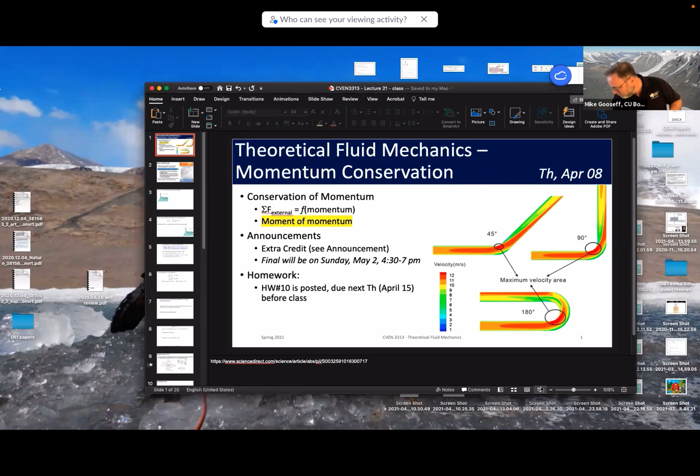This is the same cover slide we had last Thursday before the exam, but we're now working through this moment of momentum concept that we'll be talking about today. For announcements, I'll run over the extra credit real quick again.

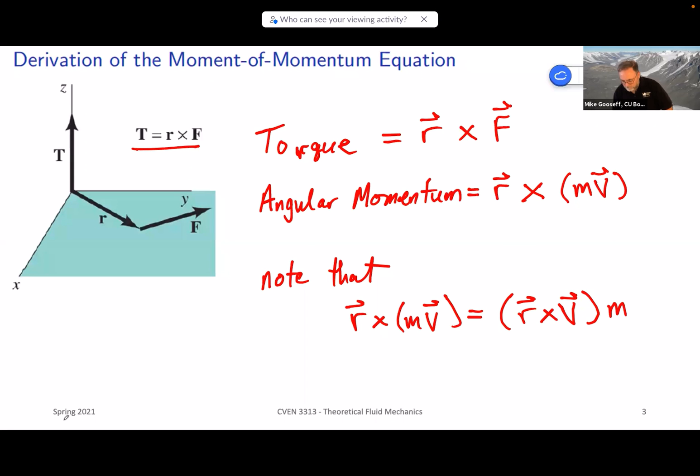We had this equation when we were deriving the momentum conservation equation from Newton's second law, which said that the sum of the forces acting on the system are equal to this derivative of the integral of momentum of our system, which equals the momentum stored within a control volume plus any exchanges across the control surface of momentum.

If we extend this equation to the moment of momentum, we would basically have something that looked like this: the sum of these torques, R cross F for the system, is equal to d dt, this big derivative with respect to the integral over the system of R cross V, and then outside we're going to keep rho and dV, where this V with a cross through it is the volume.

So this is essentially looking at the moment of momentum as it's summed outside of this system or acting on the system, which is equal to this derivative of the integral of the moment of momentum for the system itself.

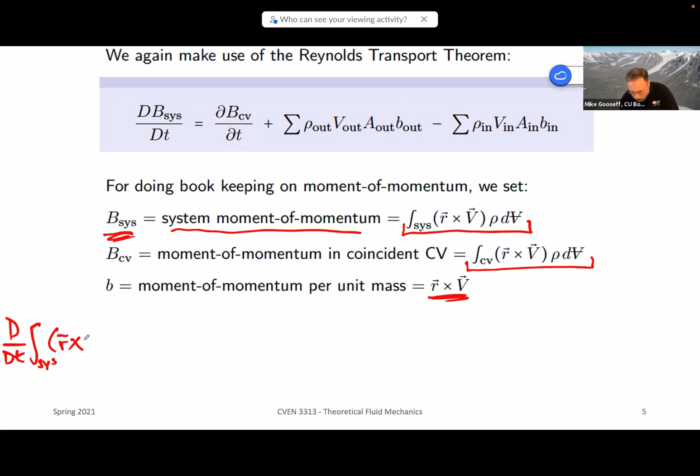So d/dt, the integral over the system of the radius vector multiplied by some velocity vector times rho dv. This is the system component, so this is the left-hand side here, okay?

Let me try to get clever and do some color coordination. So this component here we'll write in blue. So we say this equals del t of the integral over the control volume of the stored moment of momentum, so R cross V.

rho dv, and again, the v with a cross through it is not velocity, this is now volume. And then let's look at the exchanges. Now let's go with green, and let's do the outflows first since that's the sequence we're going in. So we're going to add the sum of rho out times v out

times a out. You're probably wondering, well, that seems kind of lame, we've done that already - that is essentially these three pieces. Now we have to add the little r component, so now we multiply this by r cross v, and then I'm just going to put an out here. Okay, and then finally, pen color, do something that shows up a little better.

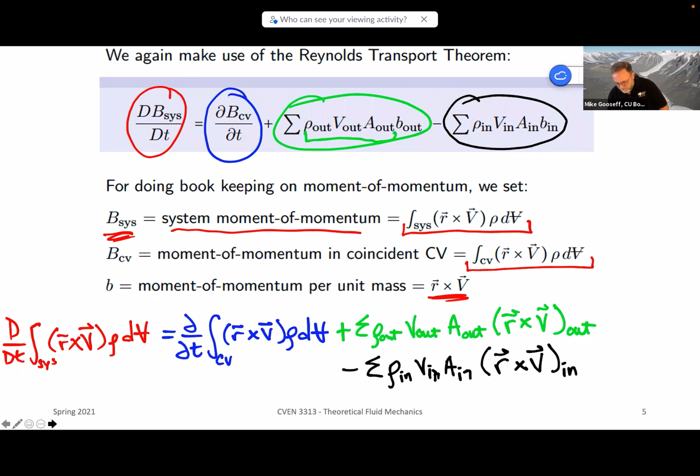So the interpretation of this expression - these are the four pieces we just wrote on the previous slide. The left-hand side was the top term, this was the first one on the right-hand side, and then these are the second and third on the right-hand side, right? So essentially, this term is the rate of change of system moment of momentum.

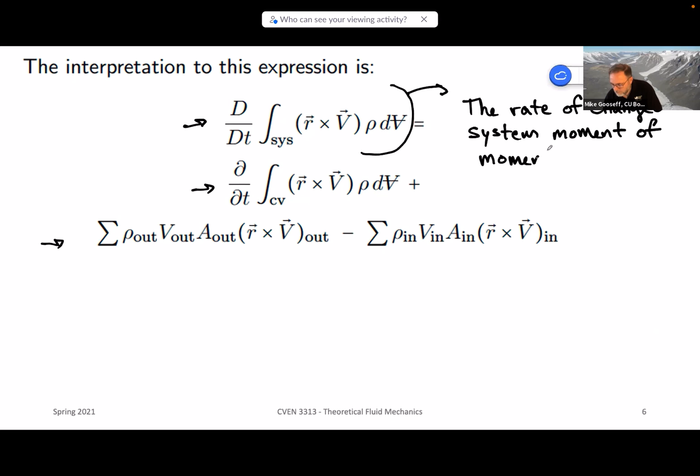Okay, I guess I should have probably kept my colors the same way I did on the previous slide, sorry about that, but I'm going to change color for this one. What was our second one? I think it was red. What did I do here? No, we were red then blue. Okay, so the second one here that's blue is this first term on the right-hand side now. Its interpretation is the rate of change of the moment of momentum in the control volume.

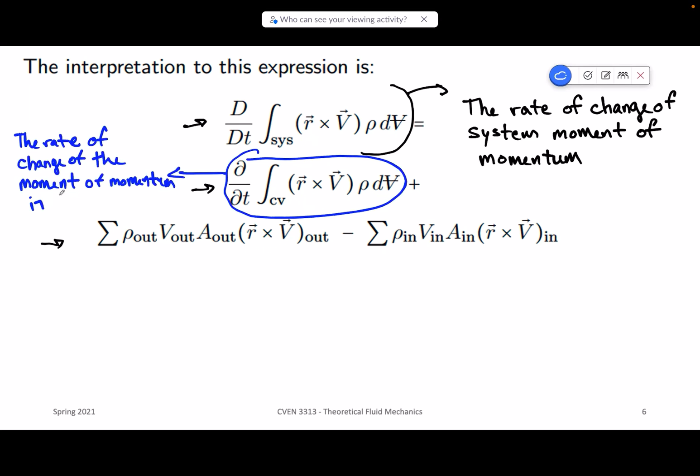So we know that in part because the integral is only done or evaluated over the control volume. That little c-sub-v tells us that this is about storage within the control volume as opposed to the entire system in the top, what's indicated in the top term in this case.

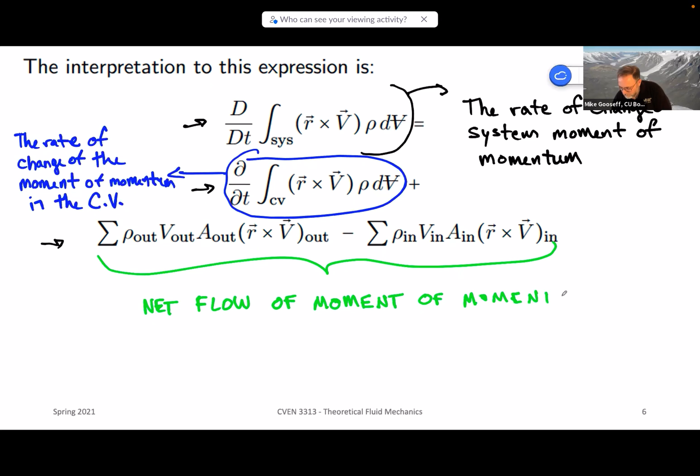And then finally, let's see, I used black on that one. I guess we'll go with green to just indicate that these two are about overall - these last two terms are about the net flow of the moment of momentum across the control surface.

Right, and we know that in part, I guess we know that mainly because we have ins and outs noted, but if we had left it in integral form, the integral would have been taken over C-sub-S for evaluation rather than these ins and outs, right? Or rather than CV, rather than CS. So that's one clue to think about what each of these terms mean, looking at where or what that integral is being taken or evaluated. And then in the case of the ins and outs, clearly we're looking at the fluxes across the control surface.

Well, I'm not real fond of how light that green is, I'll try to stay away from that. That's not a lot of contrast there with the background being white. So, all right, let me change my color.

Was there a question? Yeah, we just have a question in the chat. Just kind of what are the units for R cross V?

Let's see, so it's just going to be like a moment. R cross V is going to be meters, or length squared per time. I was thinking back to torque. Torque is going to be like a force times the length, which we had written on the first slide today.

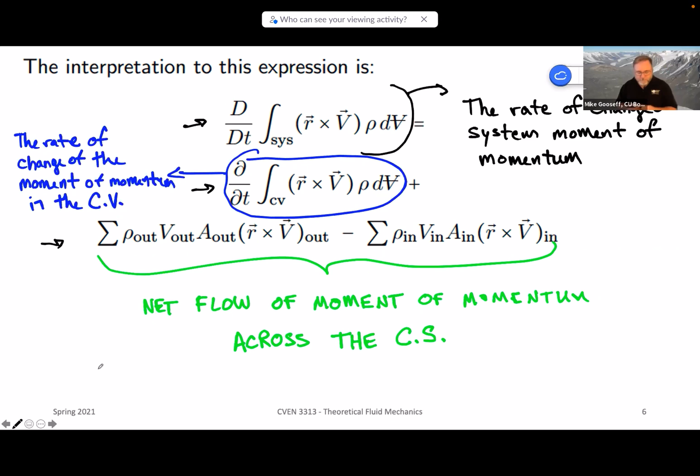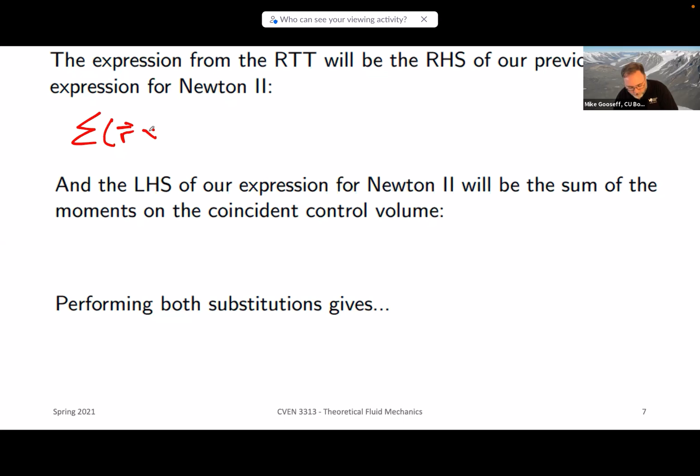Great, okay. So the expression from the Reynolds transport theorem will be the right-hand side of the previous expression for Newton's second law. In other words, we can write this sum of R cross F, so this is the torque or moment part. The system is equal to d/dt of the integral over the entire system of the contained moment of momentum.

So then the left-hand side of the expression for Newton's second law will be the sum of the moments in the coincident control volume. So what do we mean by that? Essentially that the sum of R cross F of the system is equal to the sum of R cross F for the control volume as well, when we're coincident in that control volume.

So if we substitute both of these things into the long equation from the previous two slides, it looks like this. We're going to have the sum of R cross F over the control volume equal to the time derivative of the integral over the control volume of R cross V times rho dV. This is the control volume term, plus the sum of rho out, V out, A out, times our R cross V also going out.

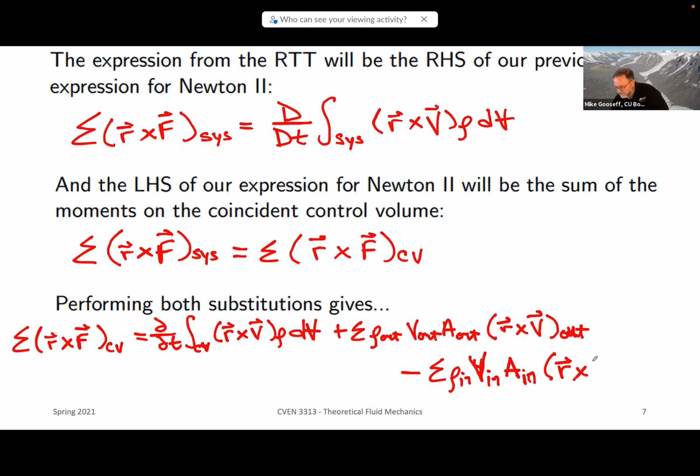My V's are not coming through, sorry about that. And then we subtract the sum of the inflows: rho in, V in—this is supposed to be velocity, not volume—A in, multiplied by R cross V on the inflow.

So we've evolved this a little bit, we still have forces on this left-hand side, but now we're looking at the forces acting on the control volume rather than just the system overall. We've substituted those, but this is in the case of the system being coincident with the control volume.

So on the next slide, we're going to look at what happens when we have steady flow, how we simplify, and what happens when we account for being incompressible. In that case, rho out equals rho in, so we can simplify again. All right, let's do that on the next slide.

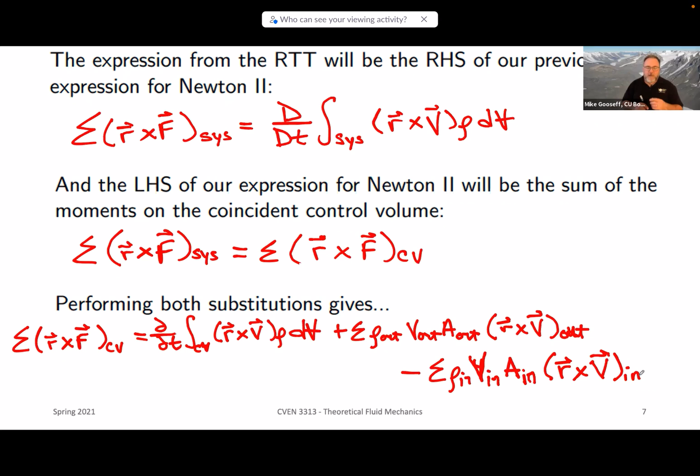This is something we did with momentum as well, but now we'll do it with moment of momentum. When we have steady flow, there's no change in time, so that term is essentially going to go away. What we end up with then is the sum of R cross V acting on the control volume being equal to just the exchanges across the control surface.

So the sum of rho out, V out, A out, multiplied by R cross V out, and then subtract the inflows. I think I have one little error in my notes, but I just identified it, so let me try to avoid it here: rho in, V in, A in, times R cross V in.

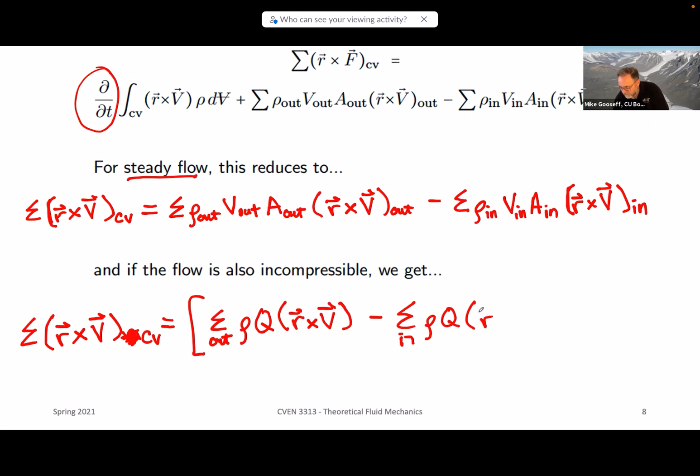Acting on the control volume is equal to, now we can write this in a more summary way: the sum of the outputs of rho times Q times R cross V, and then we subtract the sum of the inflows of rho times Q times R cross V as well.

So all we did was simplify that because the rho is the same for whatever fluid we have coming in and going out, and we got rid of that temporal term as well, since we had steady flow condition and incompressible flow.

I think this will make a little more sense when we start to look at some diagrams and so forth when we put this into motion to put to use.

First, I want to talk a little bit about angular momentum because we have to deal with some velocity nomenclature, which is to say that sometimes things are spinning in one direction, but they have outputs of velocity going sort of in the opposite direction. We need to think about which of those impact the velocities we have here, and which velocities we're going to use for the V and vector V components in this equation.

So angular momentum here, we are interested in relating the torques or force moments to angular momentum. For example, what torque flows from a rotating sprinkler, does the flow from a rotating sprinkler cause, is a reasonable question.

So let's take a real simple sprinkler. We have flow coming in down at the bottom, obviously it goes up the shaft here, sort of the center axis, and then it gets distributed out each of the two arms. And what you can see is that omega is telling us we are spinning, if we do the right-hand rule, we're spinning sort of in the upward direction. But the flow is coming out in the opposite direction.

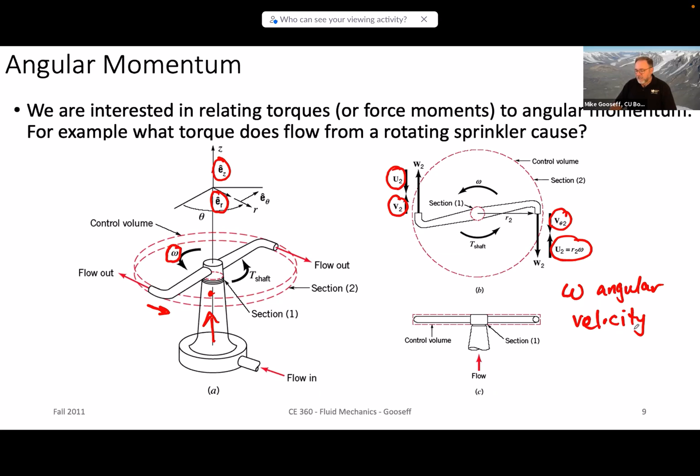You can see that the torque about the shaft is going in the same direction as omega, as this angular velocity. But the angular momentum is dealt with by looking at W, V, and U out at the edges. So let's relate all of these things on this next slide.

Okay, here we go. So the simplified form of this is that the shaft torque, or the torque about the shaft, is equal to minus m dot in, so that's just rho times Q, times plus or minus r in v theta in, and I'll define each of these below, plus m dot out plus or minus r out v theta out. So T shaft is obviously the torque on the shaft.

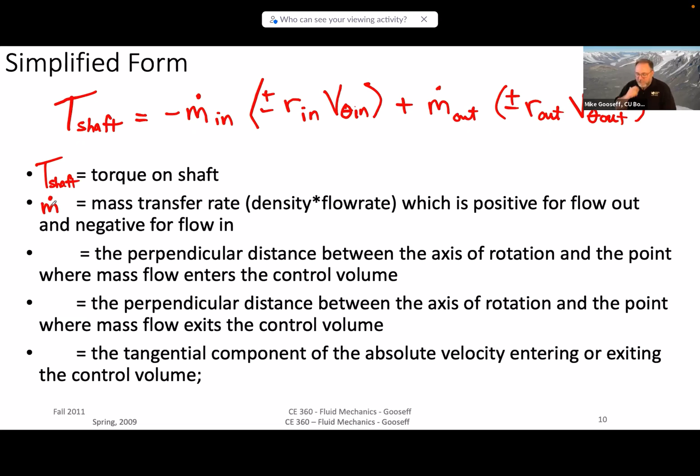This m dot is our mass transfer rate, so it's density times flow rate, rho times Q, which is positive for flow out and negative for flow in. Those rules are defined by the original Reynolds transport theorem, whether that sign is negative or positive.

R in is the perpendicular distance between the axis of rotation and the point where the mass flow enters the control volume. For a sprinkler, R in tends to be small or zero because you're putting water directly up that shaft. It comes up in the axis itself vertically.

And then R out... is the perpendicular distance between the axis of rotation and the point where the mass flow exits the control volume. So now we're looking at essentially the length to get out to where the sprinkler head is spraying the water out.

Finally, V theta, we could have it in and out, but V theta is the tangential component of the absolute velocity entering or exiting the control volume. This is critical because the direction of this, if it's tangent to the circular path of the sprinkler head, we need to account for a component acting perhaps only tangent to that circle, in the theta direction. So we're working now in this framework of radial coordinates.

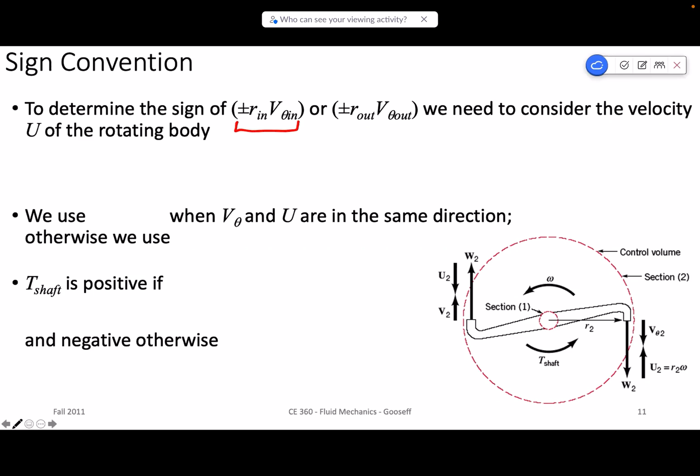So to determine the sign, we just got a few questions from a couple slides back. Someone asks, isn't the sum of R cross F for the CV part? I'm not quite sure what they're asking there.

Oh, on the left-hand side, did I goof that up? Let me see. Yeah, I was just saying it was R cross F, not R cross V, for the CV. Yep, you're right, I did. I made that mistake twice. It's funny because in my notes I had this one wrong as an F, and I knew that was incorrect, but I did not catch that I could completely goof this one up.

This should be, my apologies, R cross F. Yeah, so this is the torque, and this should also be R cross F. Sorry about that.

People are also asking to clarify the differences between momentum, moment of momentum, and angular momentum. The angular part of this is simply that we have something that is spinning. The classic example to get this idea across is using sprinklers, but ultimately we could be looking at forces acting in any direction that gives us a torque, right away from...

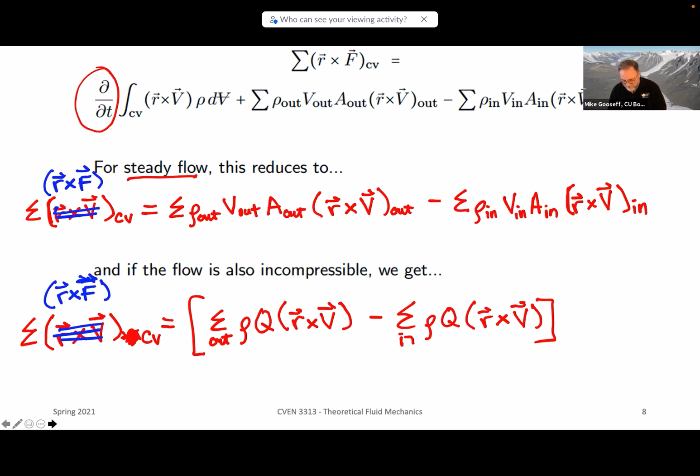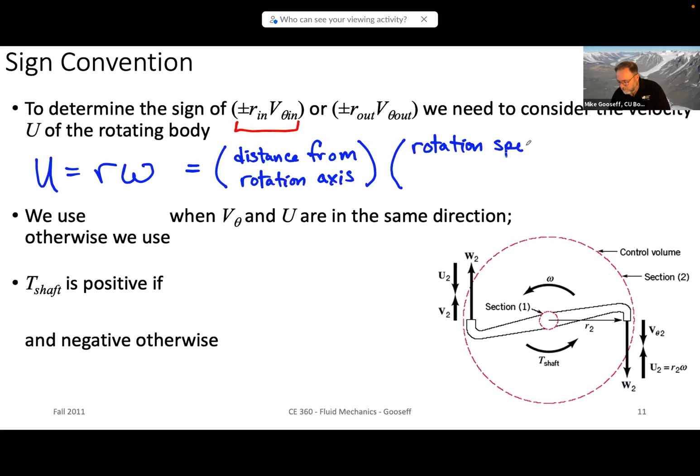Okay, so we need to consider the velocity of the rotating body U, and U here is going to be equal to R times omega. R is clearly the distance from the rotation axis, and then omega is the rotation speed of the shaft. That's those two values coming together to give us the velocity of the rotating body.

The speed at which a sprinkler head is moving in the plane that it's moving. Now we're going to use plus R times V theta when V theta, this tangential velocity, and U are in the same direction. Otherwise, we're going to use the negative version of this, negative R times V theta. So it all just matters whether V theta and U are working in the same direction or not.

And then this shaft torque is positive if it's in the same direction as W, capital W now, not omega, capital W, and negative otherwise. So in this case, this capital W here is essentially indicating our momentum that's coming out the end.

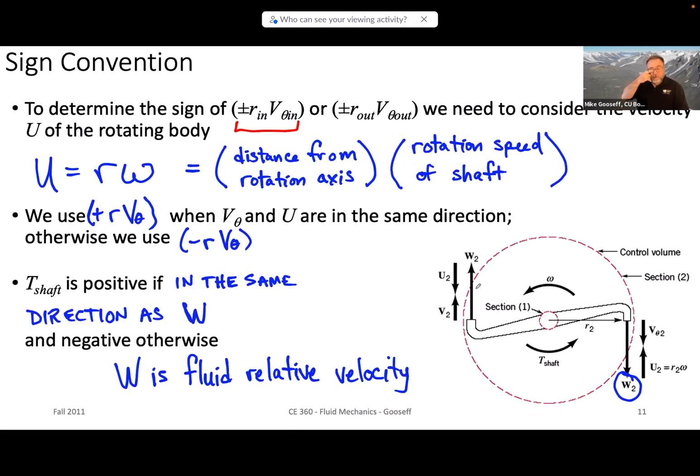Now what do we mean by that? Well, it's about this difference in a way between U and V, essentially acting in opposite directions, so W is sort of the resultant in some way. Let me define that on the next slide.

After the sign convention, we'll talk about, let me make sure I've got this right. We'll have the tangential velocity that we'll define here, this V sub theta.

All right, so V theta, this tangential velocity, is equal to W plus U, and capital W, as we said, was the fluid relative velocity. And U, capital U, is the rotating body's velocity.

So that's why on the previous slide, when I wrote capital W, it's the difference between, if we algebraically moved U to the left-hand side, it would be V theta minus U, this difference, the balance then for this velocity.

So for all of the angular momentum problems that we're going to solve in this class, we'll use this fairly simplified momentum equation, which I wrote out on the previous slide. The torque for the shaft, T shaft, is equal to minus m dot in times plus or minus r in v theta in, plus m dot out times plus or minus r out v theta out.

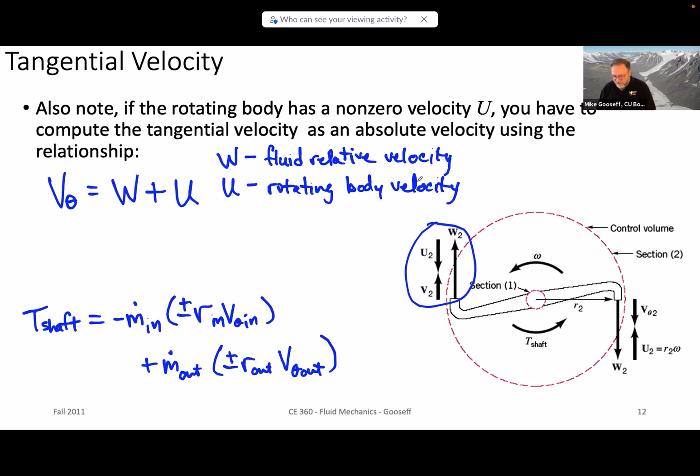I'm not quite sure why that went away, but let me just note again this relationship for these guys at the top, this definition of v theta, the theta is actually used over here. In any event, capital W is the product or dependent on v theta and U, and then we're going to use that v theta when we get down to calculating the shaft torque.

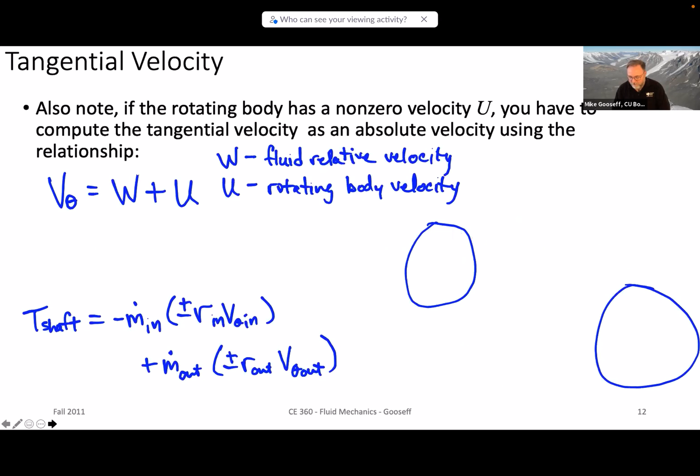Okay, so the next thing I have queued up is to go through an example where we put all these things together using this torque equation, and then go through how we calculate v theta and so forth. Hopefully this will all culminate a little better, because I realize it feels very nebulous without a more concrete demonstration of where these velocities lie, how they relate to each other, and how they help us figure out something like this torque on the shaft.

Okay, so here's our example. We have 5 liters per second of water entering the rotor shown along its axis of rotation. So this is that, 5 liters comes in, it goes straight up the shaft, and then there's a cross-sectional area of each of 3 nozzle outlets of 18 square millimeters.

So how large is the resisting torque required to hold the rotor stationary if theta equals 0 degrees? In other words, we're going to look down on this. Let's see, do I have a better picture? I don't. Okay, so right there, that's where theta is defined. Theta is essentially an angle that says whether you're tangent to the line of this radius or whether you are not tangent to that. So it's sort of the degree of tangentiality, let's say.

And so if theta is equal to 0, then these are probably scooped back a little bit, and they are simply set up in a more streamlined way to go with this rotation.

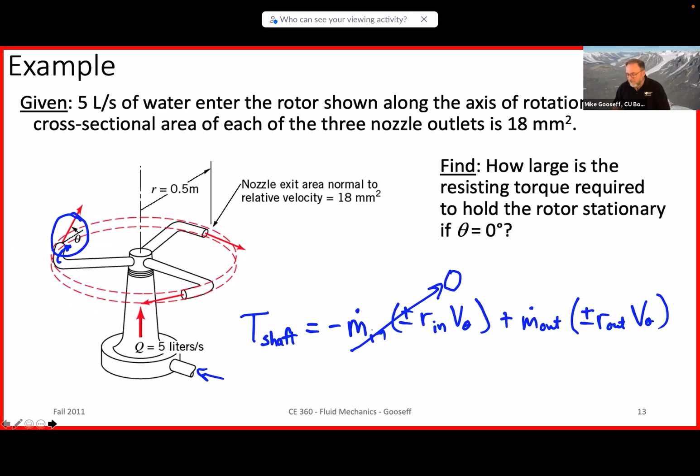Okay, so that's where we're going to go next as we work this out. I'm going to move to the next slide. Oh, I did not copy over the image on the next slide, but I think it will be fairly straightforward. The other thing we need to do here is note that on the previous slide, let me get my image back.

This theta that we identified has something to do with this direction of flow, and with the way we are defining that angle theta here. What we really want is the cosine of that angle, right? So we're going to modify this equation slightly to include cosine of theta, simply because we've been given information about whether this is coming through at an angle to the circle we're spinning through, or whether we were coming just straight out. We need a component that tells us something about what's going on at the head of the sprinkler.

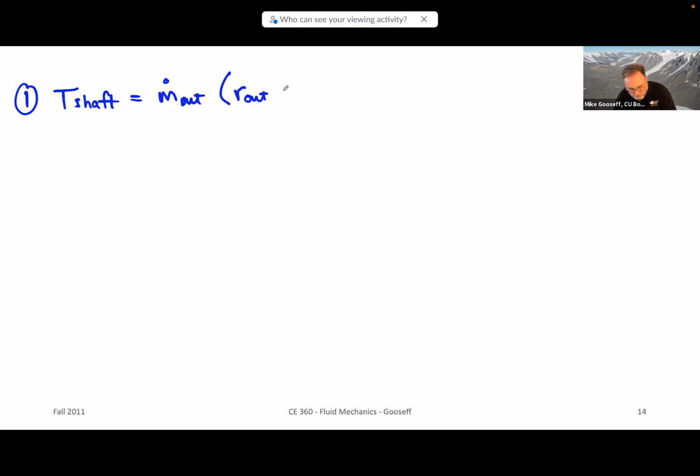So let me just rewrite this. Step 1 is to rewrite this simplified: T shaft is equal to m dot out times R out times V out, or V theta. Actually, this will just be V out times the cosine of theta. So in other words, we're changing V theta to basically be V out times cosine of theta.

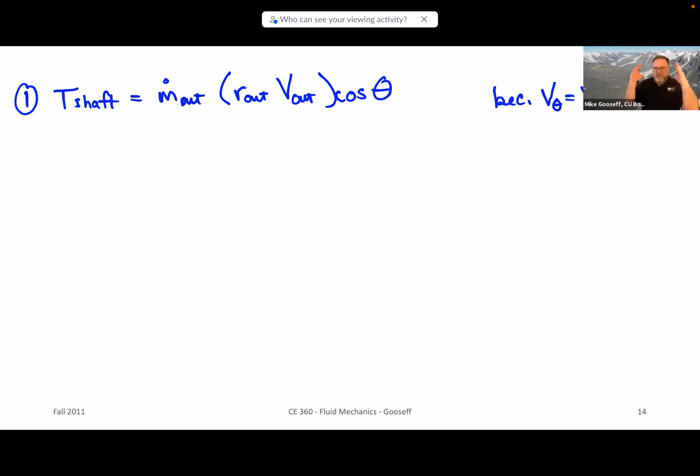Okay, so that's the way we're re-representing V theta here. Now I've left the cosine outside of this parenthesis. I didn't have to. I could have written it inside as well to purely replace it inside the parenthesis. But in any event, we have this to work with.

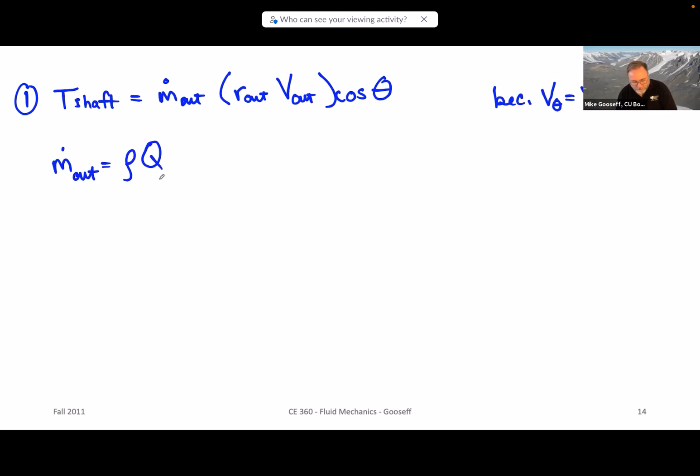Okay, so what is m dot out? We said m dot out is equal to rho times Q, and in this case we're given 5 liters per second, and we multiply by, let's see, we are working in metric, so we would have 1,000 kilograms per cubic meter.

So we can, let me think. This is going to be equal to, I'm not going to do the conversion yet. Let me just leave it in these terms here: 1,000 kilograms per cubic meter multiplied by 5 liters per second. Now, I know that eventually, when I put it into this equation up top, the T shaft one, I will then put in the conversion. But just noting that we have that is helpful, and all we need to do is work on a conversion.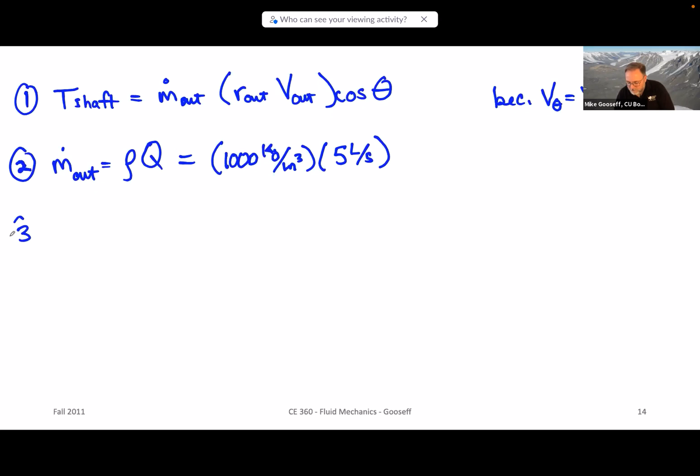Okay, now what about V out? So we know what R out is. R out is the radius to get out to the head. And in this case, we were given R is half of a meter. All right, so that's pretty big. So we're given that R out is equal to 0.5 meters.

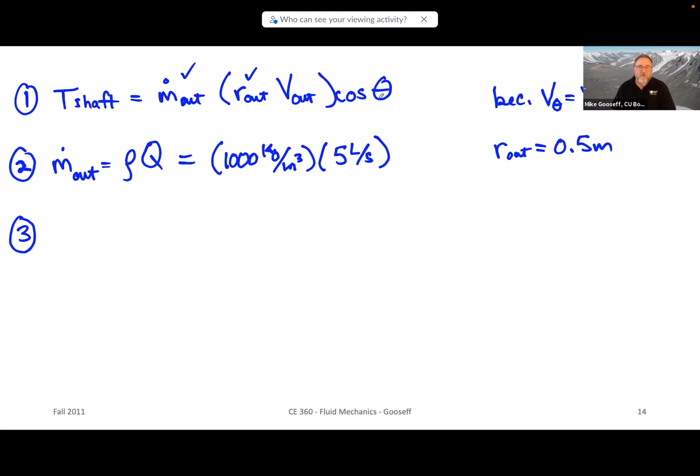So we know this, we've just calculated this. We get a final number. We're given the cosine of theta. We know that theta is equal to 0 in this case. So we just need to calculate V out.

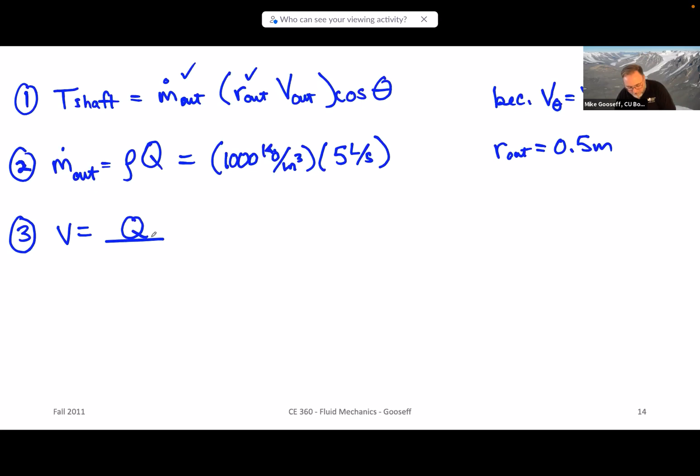Now, V out is only complicated by the fact that we're taking all of that 5 liters per second and splitting it out in 3 ways, right? So V out is simply going to be equal to Q divided by these 3 times the nozzle areas. So it's only 1 Q, 5 liters per second, and the velocity coming out of each one is essentially that Q divided by 3 of those areas at the edge.

Okay, so this would be equal to, again, we can do the conversions, but 5 liters per second, just as a check to know if we have everything, divided by 3 times 18 square millimeters, right? So we need to convert that to meters, and we'll have to convert our liters per second into meters as well, and we can work this out.

So if I rewrite this now, before I do all the substitutions, let me take one step to simply say that T shaft is equal to rho times Q squared times R out times the cosine of theta divided by 3 times these nozzle areas.

Okay, so granted, I've taken the step of kind of putting in these values already. So on the next slide, we'll go ahead and put all the numbers together and the conversions to be able to calculate a value. I'll give you a second to catch up, just make sure we're all at the same point. By the way, this is the next slide, next 2 slides will be fairly brief, and then I'll have 3 of our conceptual questions to ask after that for participation. So if you need to get your iClickers ready or your Reef app, go ahead and get those going.

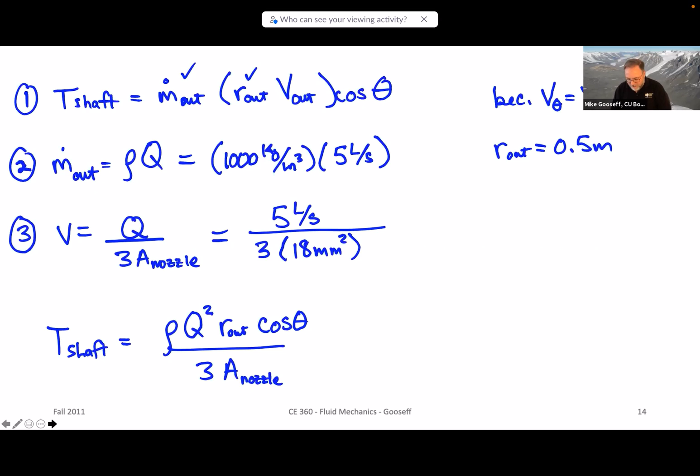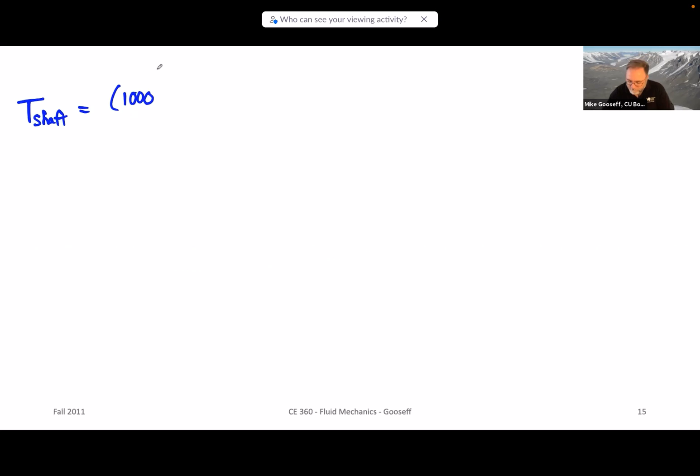Okay, so here's our shaft equation now, the torque on the shaft, and we end up with T shaft is equal to 1,000 kilograms per cubic meter, and we multiply by 5 liters per second. That quantity is squared. We multiply by 0.5 meters for our radius out. We multiply by the cosine of 0 degrees.

And then we multiply by 1,000 millimeters. Oh, this is for the denominator here. Let me write that in. 3 times 18 millimeters squared. And this is 1,000 millimeters in 1 meter. We're going to square that for the denominator. And then for the numerator, for these liters per second, we can just divide by 1,000 liters per meter cubed, right? And so when we multiply this out, we end up with this shaft torque

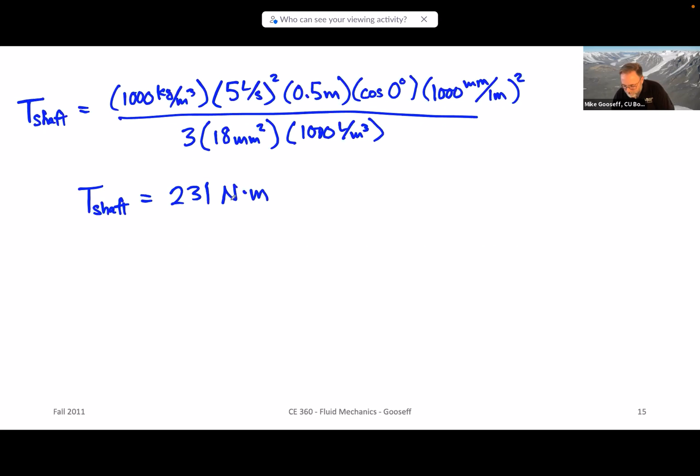as being equal to 231 Newton meters. Okay? So that's how much torque you would have to apply to keep the head from rotating. It's also the amount of torque that is generated by putting this 5 liters per second through this particular sprinkler.

Now, a quick question before we finish this example altogether. Cosine of 0, of course, is just 1, right? So an interesting question would be to ask, what happens if theta is greater than 0? In other words, if that angle is not perfectly aligned with the tangent and it comes a little further out and out, maybe it's 30 degrees, 60 degrees, what happens then?

Well, let's just look at the equation. If we start to increase, let's go from 0 to 90. If we increase the angle, cosine theta, right, if we make it like 45 degrees, that's going to be less than 1, right? In other words, the cosine of 0 is equal to 1. Anything, any angle between 0 and 90 degrees is going to be less than 1, which means that the torque goes down, okay? So the overall shaft torque that would be calculated will decrease whenever that theta angle increases between 0 and 90, all right?

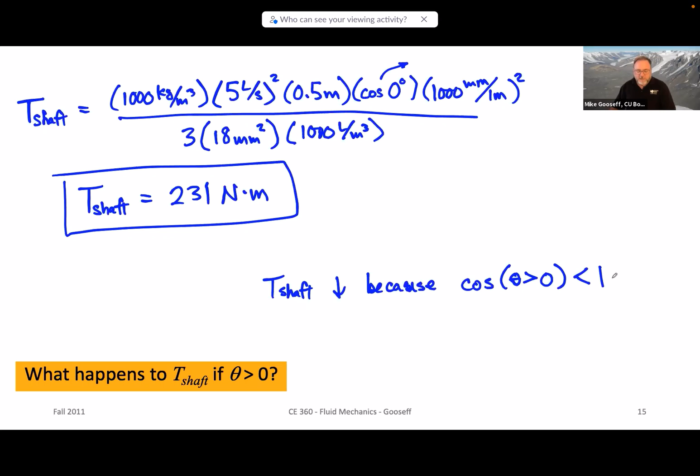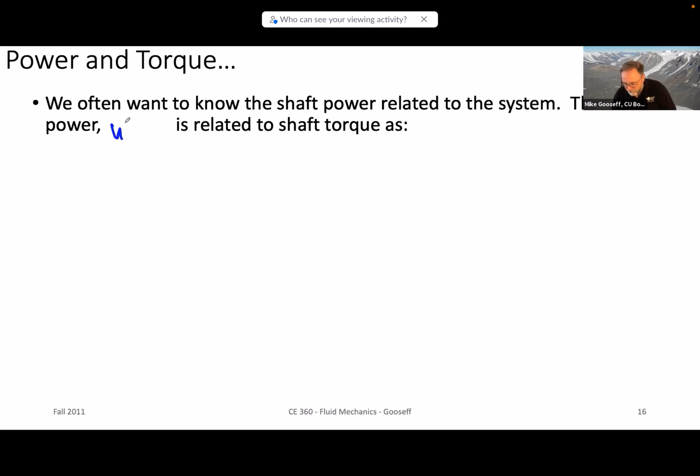Okay, the last slide I have here is to just relate torque to power. Power is an important aspect when we're thinking about pumps or other types of roto machinery. Sometimes we have to think about the power that's required. So we often want to know the shaft power related to the system, and we write that as W dot shaft. So this power for the shaft is equal to the torque of the shaft, or acting on the shaft, multiplied by omega, the angular velocity, or the rotation velocity of the shaft itself.

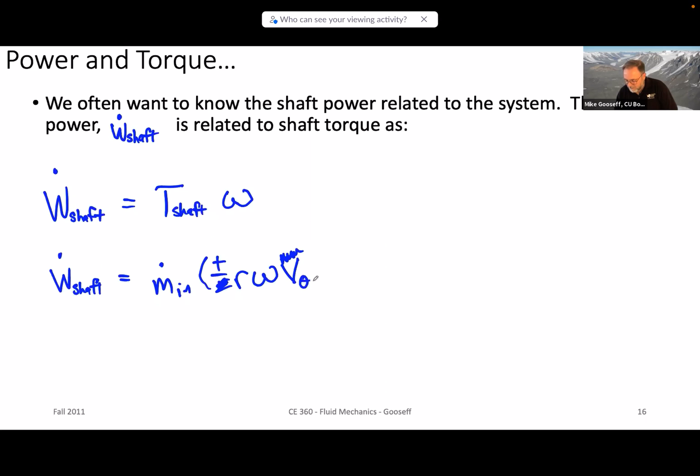So we can also write that as W shaft, I realize there are a lot of W's here, apologize for that, is equal to M dot in times plus or minus R omega V theta in, plus M dot out times plus or minus R out times omega times V theta out. Okay? So all we did was take that omega and distribute it inside of these two terms on the right-hand side that we had expanded before to talk about that shaft torque.

Okay, so now I've got 3 conceptual questions to go through. So any questions on this before we do that? Yeah.

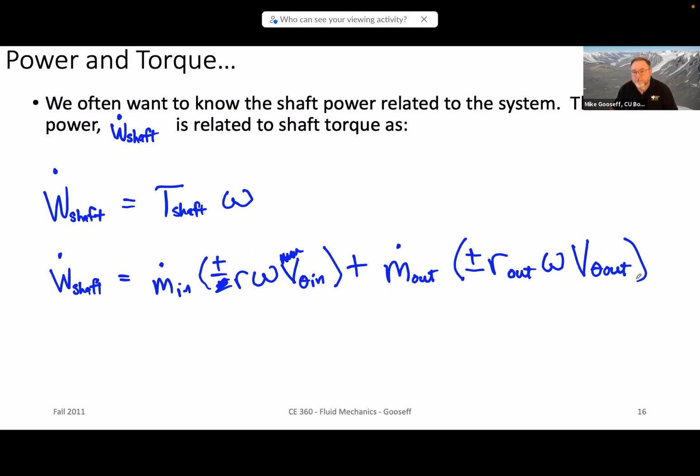Just a few questions on the last slide. First is should the answer be in kilonewtons?

Let's see, kilograms. Well, let me do the math real quick. So the 1,000 in the top and the 1,000 in the bottom will cancel out, right? Just as far as magnitudes go. So 1,000 times 5 times 0.5 times 1 divided by 3 divided by 18.

Actually, I get, what happened? Oh, I forgot to multiply by 5. 2 5s. Yep, no, I just get 231 newtons because it's kilograms meters per second squared is what it should come out to. And then times another meter for length, right? So it should just be newtons, I believe.

And then also, someone's asking, sorry, I see why they asked that. I didn't square the 1,000. Hang on a second, I see where you're going here. Should that be kilonewtons? Oh shoot, I wrote down newtons on my notes. Yeah, this does get squared. Okay, no, I guess I stand corrected. This probably should be kilonewtons. That doesn't seem right though, just from the perspective of how much a kilonewton is.

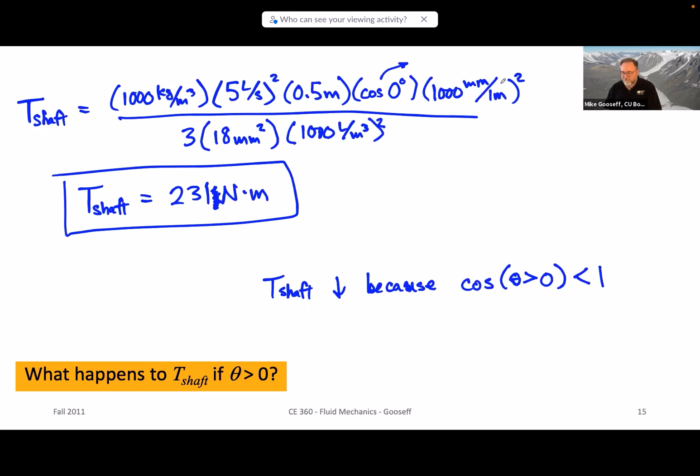And then also someone asked, in this problem, are V theta and U in the same direction since we use the positive R cross V? Oh, good question. So let's go back. Okay, so right, we did not put a negative in front of that R multiplied by V. I almost said RV, but let's go back to this. So V theta and U, we use the positive when V theta and U are in the same direction. Otherwise, we use a negative.

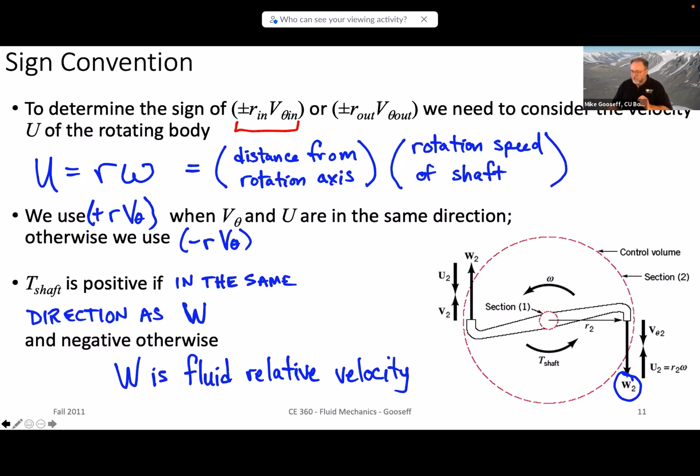And in this case, V theta should have actually been going in the opposite direction. In other words, we were spinning away. So I wonder if I left the negative out. Let me take a look at my solution. I did not write one down, but that doesn't mean I did that correctly. So I think you might be right. We're looking at the resistant shaft.

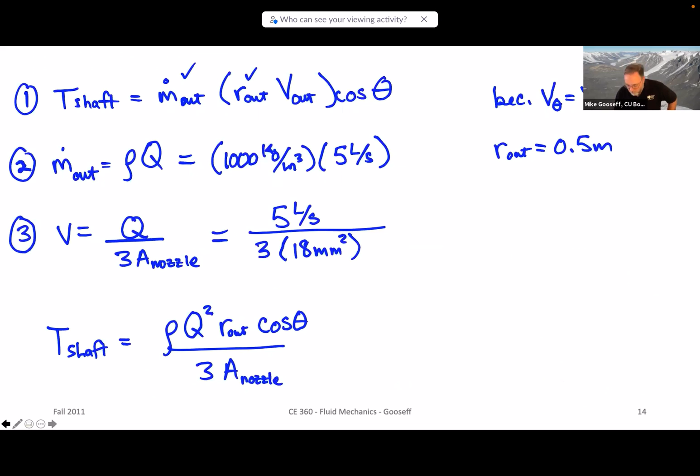Let's say, one other thing real quick. When we go back to this, note that for V theta going out in this direction, the shaft turning is in, that's in the positive direction with respect to the right-hand rule. So that ends up being positive, but U is going that way, V is going the other way. It seems like you should come up with a negative, just looking at this.

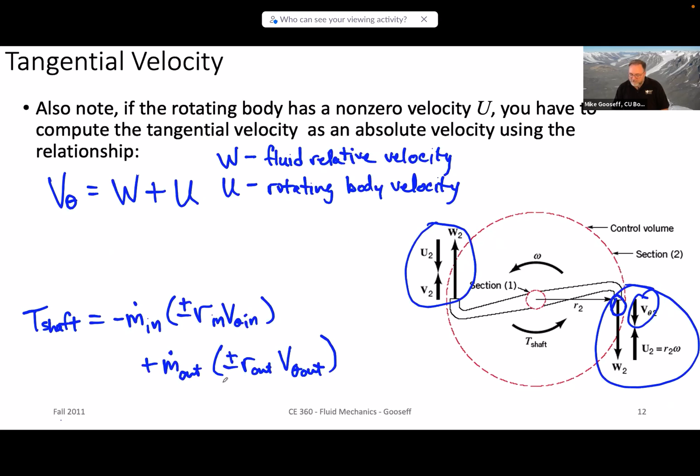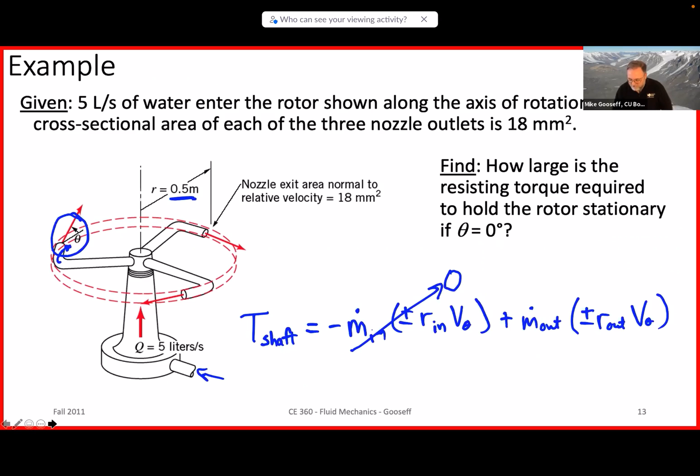Yeah, I think I've confused myself, but it does seem like there should be a negative there. So what that would mean then is that the shaft is going that way. It's got positive. This is the resisting torque, so it's got to go in the opposite direction. It seems like there needs to be a negative out here anyway, only because we are trying to go in the opposite direction. But it sure seems like I was not very consistent about checking on that.

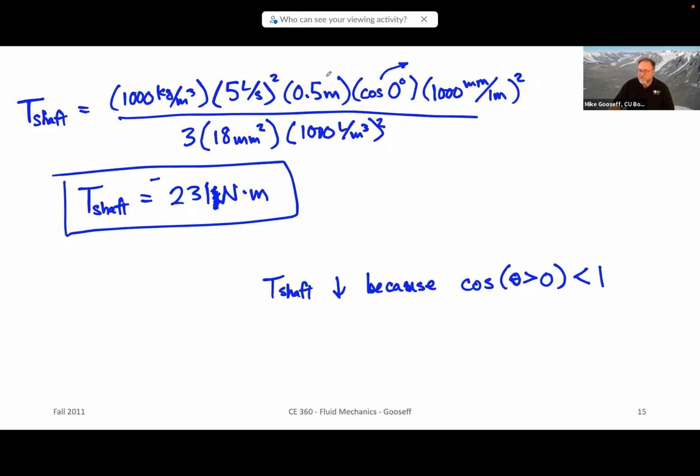So it would have been right in here, right? R times velocity. The velocity ended up getting buried sort of as a Q over A, or 3 times A. But it seems like maybe I'm missing a negative there. I'll check on that and come back to you guys on Tuesday about that.

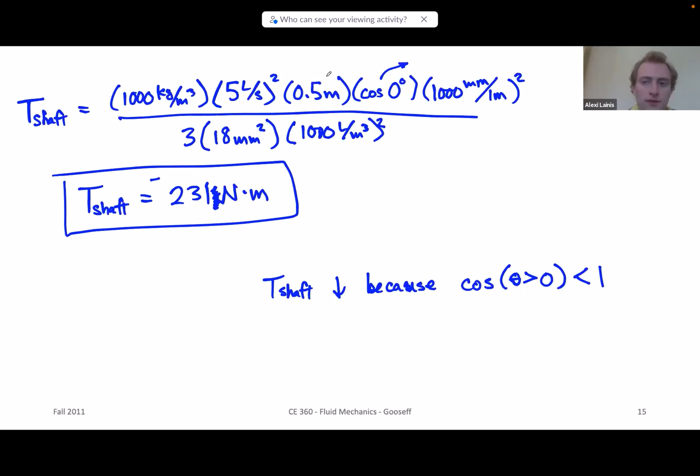Just the last note here, when this power, or W sub shaft or W dot, let me put the dot on that, shaft is positive, power is put into the control volume like in a pump. When it's negative, the power is transferred out of the control volume, i.e. a turbine. So a turbine would create power like you would put into a dam somewhere to allow water to move through it and produce energy, produce electricity. When you are trying to move water up a system with a pump, you would clearly have to plug that into the wall to get power to make that work.

Okay, so last thing here, let's go ahead and get, I've got 3 of these real quick to do these conceptual questions, and then we'll be done for the day.

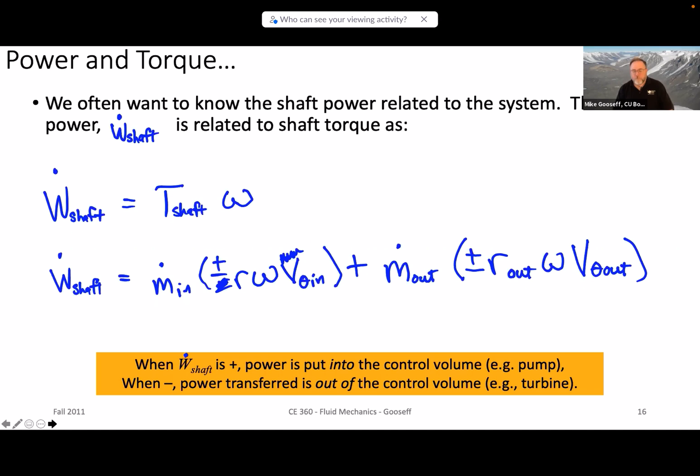So I think this was one I meant to do last Thursday and we ran out of time. But this is back to linear momentum.

A bent pipe is shown in the horizontal XY plane below. Water flow enters at velocity v, goes through the pipe, makes a 180-degree turn in the horizontal plane, and leaves at the same velocity v. The pipe is supported along its edge as shown, so we've got this support down here. Note that we have an Fy and an Fx, with force positive in the x and y directions.

The correct statement about the magnitude of the force F sub x holding the pipe in place is that F sub x should be greater than 0, equal to 0, or less than 0.

So let's see, good, we're getting some good response here. I'll let this go for a little bit, I started it early. But based on this layout, which way does that resisting force need to be to support this bend, this 180-degree bend?

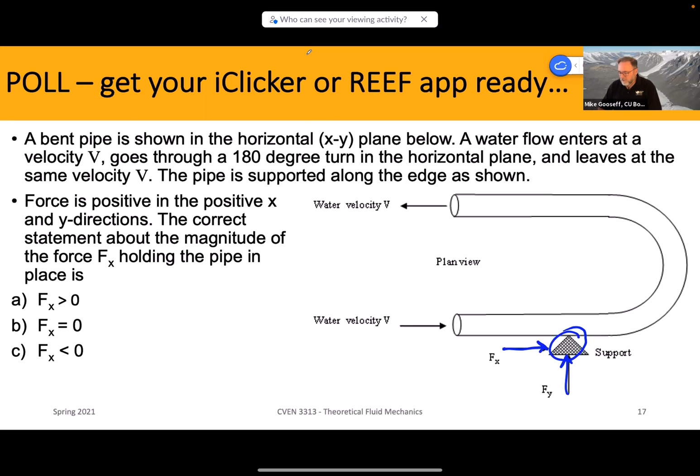77 folks online. Let's see if we get... all right, we might just have 74. Okay, I'll wait till the top of the minute and a half here. 75, that's good. 28, 29, 30. Oh good, we got 77. Okay, let's go ahead and end there, let's take a look.

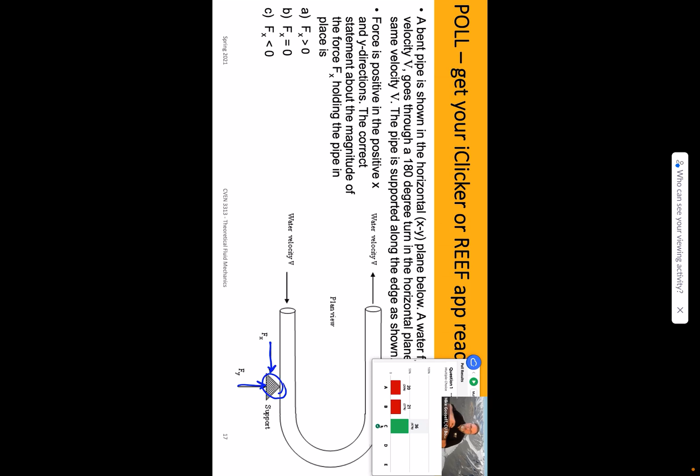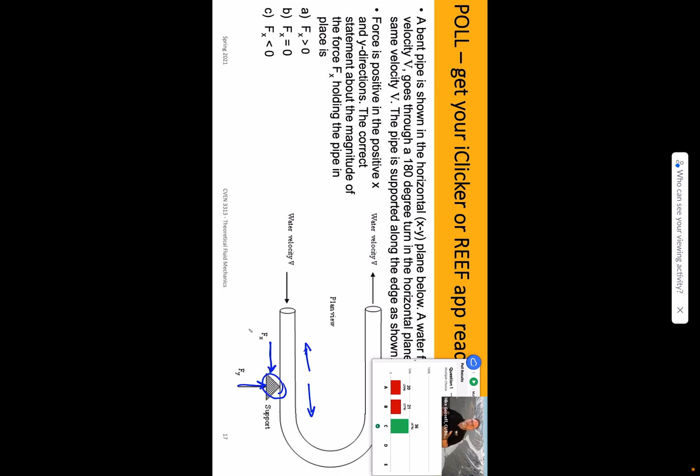Most of you said C, that Fx should be less than 0. 21 of you said it should be equal to 0, and 20 said F of x should be greater than 0. The correct answer is C. The reason is that the resulting force from the conservation of momentum through this bend will push it in one direction, which means Fx, the resultant force that holds it in place, needs to go in the opposite direction. So this support force F sub x should be working in the negative direction. It should be negative because the sign convention said that to the right is positive. It needs to be a force that holds in the left direction.

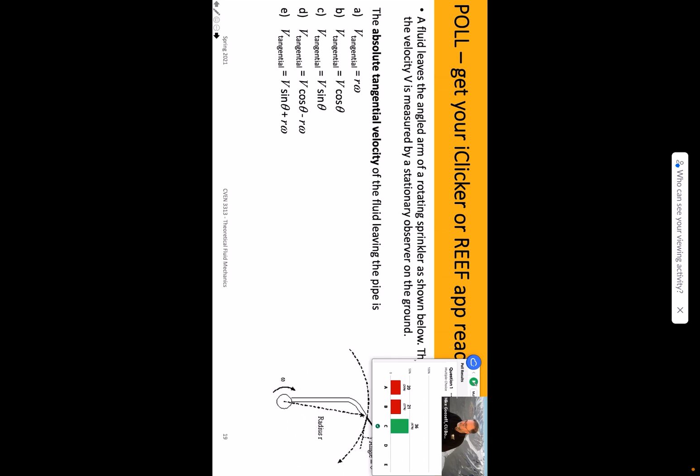Okay, next one. We'll hide that. So a fluid leaves the angled arm of a rotating sprinkler as shown. The fluid density is... the velocity is v. Oh well, I don't have a value for that, but we don't really care about the density. It is measured by a stationary observer on the ground.

So the absolute tangential velocity of the fluid leaving the pipe is: r omega, v cosine theta, v sine theta, v cosine theta minus r omega, or v sine theta plus r omega. And I'll just give you a hint: this is the same form we used in the example just a moment ago.

Wait a minute, which one are we on? This is the absolute tangential velocity. Okay, never mind, that doesn't apply here. It actually is just going to be a really simple version here. Okay, we'll give folks another couple of seconds.

Is the minus r times the angular velocity inside the cosine function, or is it subtracted from the whole thing? It would be like this. Okay, yeah, both of those. Thanks, good question.

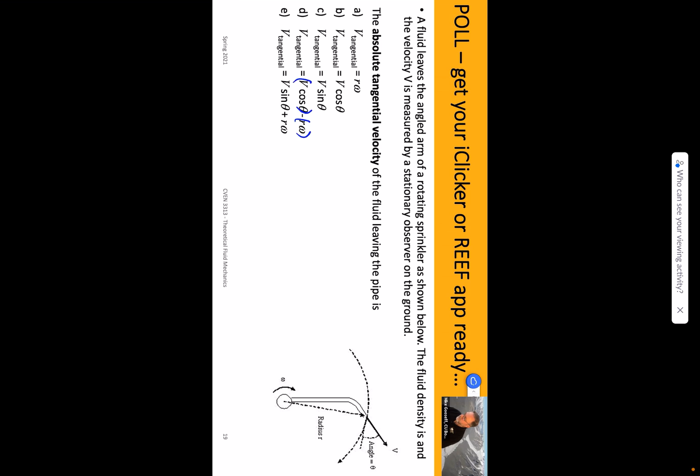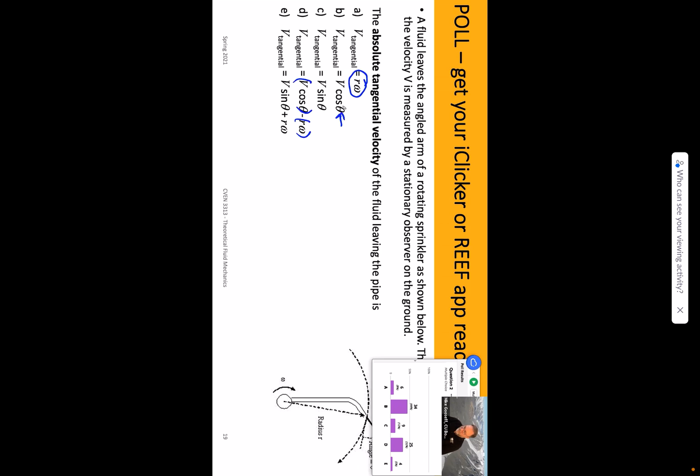Okay, so I think I misled you with what I was just saying at the beginning. This actually should turn out to be A. It's just the absolute tangential velocity - that's not the one that we end up using. We ended up using this version of it because we had an angle, but I think we have some redemption on the next one. So the 6 of you that chose A, good deal. Many of you were probably misled by what I just said with B, and D is another option as well. This sort of looked like trying to subtract maybe U from V theta. In this case, the absolute tangential velocity is R omega.

I thought I had 3 of them. I skipped through them, sorry about that.